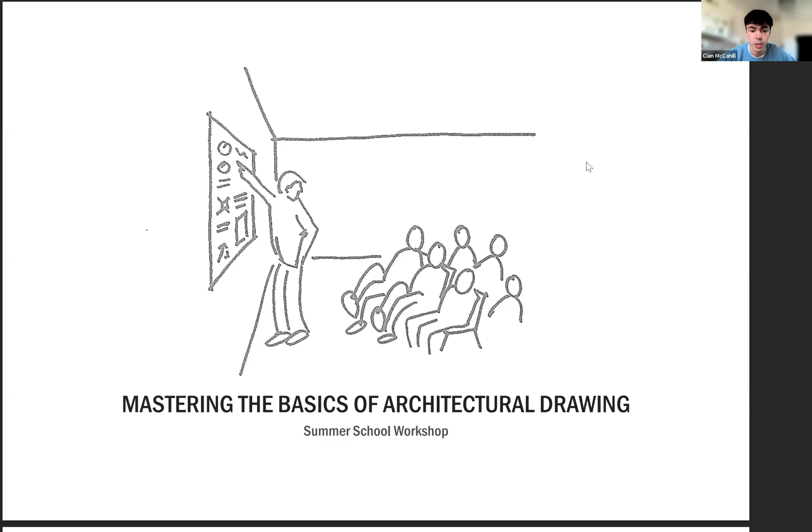So about me, I've wanted to be an architect since I was sort of 8, 9 years old. I've always loved drawing. I was pretty good at maths and things like that. But also, hey, I really love playing Minecraft. I love my Lego, everything like that. It all helps. You speak to a lot of people in first year of uni and they all reference Minecraft, weirdly.

GCSEs I took that sort of mirrored those interests, and then A levels the same. So I took art, maths, and physics at A level. That was in Northampton. And then when I got my A levels, I moved to Norwich University of the Arts. I'm going to boast and say that the architecture building in Norwich is like one of the coolest uni buildings, Boardman House. So I spent 3 years there, annoyingly through COVID. So I started there in 2019.

So I finished there in 2024 and then got a job as a Part 1 architectural assistant at Kirby Architecture, which is a practice based in Suffolk. You can see my team there: Sam, me, Andy, Alex, and Miles, the director. And I finish there literally in a couple of weeks. It's been a really good year, really enjoyed it, learned a lot. But in September, I'm off to do my master's at Manchester School of Architecture. So I'm looking forward to that.

So I want to go through what it takes to become an architect, in this country at least. So you get your GCSEs, and then you will get your A levels or A level equivalent. Hopefully, some things that are somewhat related to the course. Although some unis aren't too bothered as long as you have a good portfolio, or you can talk about what you want to study, the kind of thing you enjoy. So then, yeah, obviously you go and get your degree.

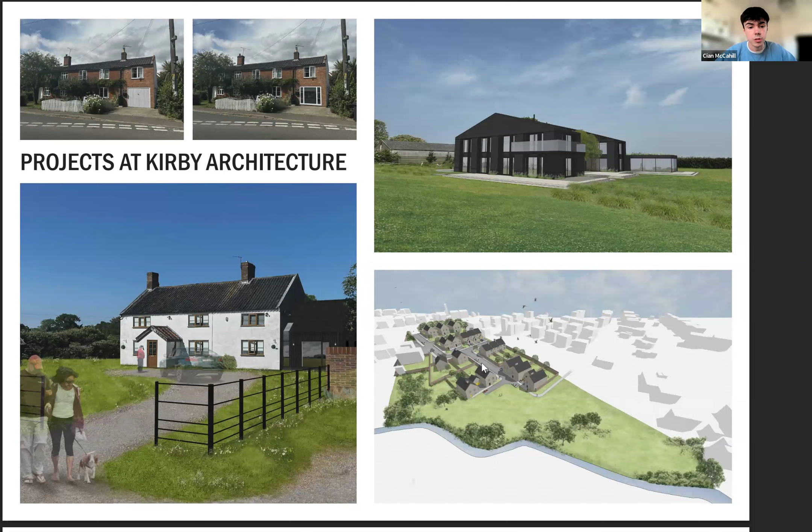So that's master planning. In the bottom right, you can see a housing development in Oxfordshire that we're currently working on. That's what it will look somewhat like. We're still getting lots of comments back from the council and people that live around the area. But yeah, that's in the works at the moment. So big range of scale.

It's been great fun. So today, obviously, I'm here to give you the basics of architectural drawing, but I'm also here to answer questions. We'll have a few tasks. Nothing serious, we can keep it pretty chill. I'm also going to be heavily referencing this book here. I've got it with me as well. 101 Things I Learned in Architecture School.

That's maybe one of my favorite books of all time. It's a fiction book, but it's just about cities and spaces, and it's kind of magical. It just gives you a new way to think about cities and architecture and places, and it's amazing.

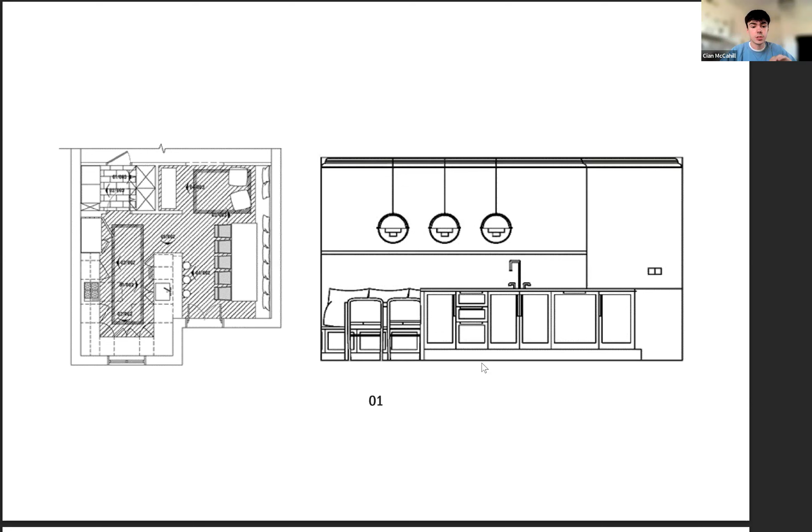And as soon as you make the one change of changing line thicknesses, suddenly you gain a bit of depth. The drawing becomes more legible. People can understand it more as a 3D space, even though it's just a 2D drawing. So that's the other thing, line hierarchy. So they're your 2 rules for today: how to draw a line and line hierarchy.

So I want to go through the 4 main types of architectural drawings. Some tutors at uni will say there are many more. Some will say there are actually just 3. But for today, I'm gonna tell you guys that there are 4 main types of architectural drawings.

Cian, just before we get onto that, if I could just jump in. Yeah, go for it. We've got 2, I think, really good questions. Obviously we won't jump in and do this all the time.

Yeah, that's fine. But do you think architecture is done mostly digital now, or is it still mostly hand-drawn work? I would say that in the professional world it now is mostly digital. But that doesn't mean to say that clients and other architects don't really value an architect that can hand draw. So no matter how good your digital work is, an architect that can hand draw and quickly sketch up an idea for a client on a bit of the classic napkin story, that's always going to be impressive. So I think it's always important to know how to hand draw. Yeah, for sure, absolutely.

And sorry, Mana. Yes, we will do. You'll get sent this stuff. Yeah, thanks, Otti, for that question. Lastly, Jude, and then we'll get back onto your session.

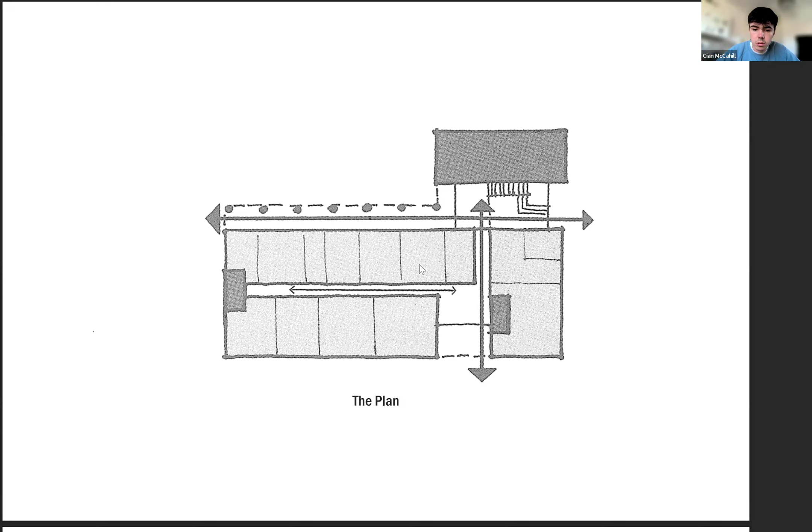You guys don't need to know this really, but usually a plan is taken at about 1.2 meters above ground level, and it's like you're taking a slice through that 1.2 meter level. So you'll see walls, you'll see where the windows are going to be, you'll see furniture. Arguably the most important type of architectural drawing. And then these. Oh, it's not flicking to the next page. There we go.

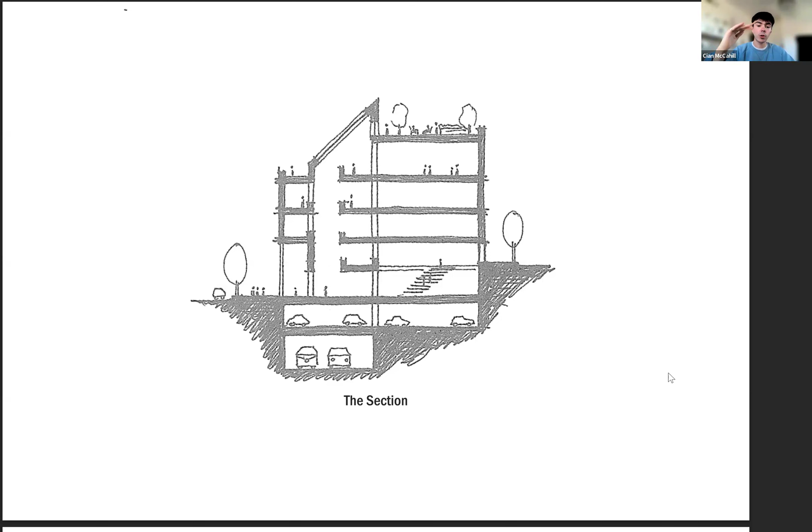So the next type of drawing I'm going to talk about is the section. So a section, you have to imagine a building like a cake, and you're taking a slice straight through the middle of the cake, and you're looking in 2D at that slice. So with this, you'll see the heights of floors, you'll see stairways, you get a good understanding of the internal spaces and the volumes through a section.

And then the next type I want to talk about is the elevation. So again, another 2D drawing, but instead of taking a slice through a building or looking down at a building, we're now pretending that we're stood next to a building and looking at that building in front of us, but completely two-dimensional. There's no depth to it. We're not drawing lines that disappear off into the distance. It's all very 2D. And we use these a lot to show, again, heights and things like that, but also the materials that we're putting on the outside of a building.

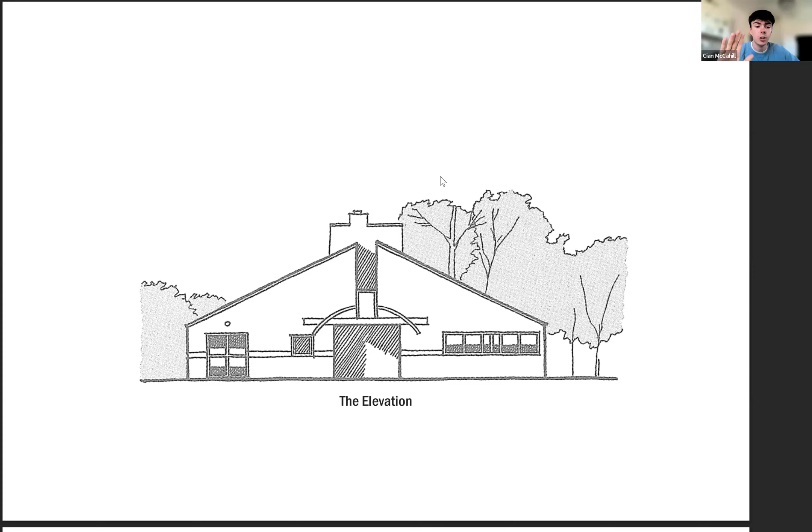We'll often show lots of options for clients of elevations of the building with different materials drawn or different window types, perhaps. But yeah, so elevations are used to show what's going on the exterior of a building. And then again, some examples, super sketchy ones, real simple ones. The bottom right is the kind of elevation we do at work. Again, really simple, but all the information that is needed is there. And you can see all the line hierarchy again in some of these, and how important it is to be confident with your lines.

And then finally, we're talking 3D. Now, there are many types of 3D drawings. You've got all your perspective drawings or oblique, isometric, axonometric. There's loads of types. You will learn about all of those when you go to uni. Maybe you already know about them now. But yeah, loads of types of 3D drawings.

But what they're really good at showing is just how a space feels that sometimes a 2D just can't quite capture. A lot of the time we'll be in a meeting with clients where we show them the plans, the elevations and the sections, and they're kind of nodding along. And then we go to our 3D drawings or our renders, and suddenly their face lights up and they actually understand what the building feels like. And it makes sense because, some of you might agree, some of these drawings are showing the building the best, perhaps. But yeah, so they're your main types of drawing.

So I guess that takes us into our first task. Really simply, I want you to spend 5 minutes drawing a plan of the room you're in. So bird's eye view, down at the room you're in. Things like the walls should obviously be your thickest, most obvious lines. But take time to draw the furniture that's around you as well. It doesn't have to be too big, this, by the way. And yeah, so 5 minutes doing that, and I'll flick back to the plan page as well, just so you can see. But yeah, 5 minutes drawing a plan of your room. If you've got any questions, feel free to ask.

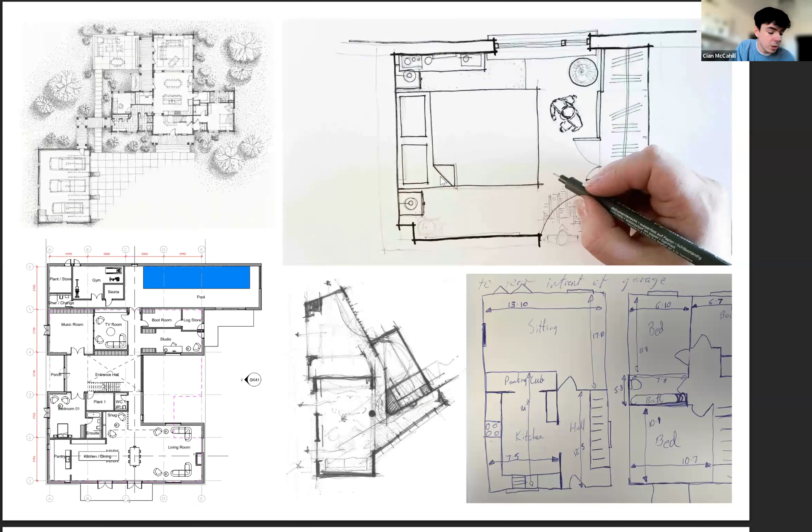There we are, Jason. Can you still see? You can't still see that screen, can you? No, but I can see it myself.

Okay. No, it's fine. So I'm going to take this opportunity to show you the Padlet board. So whilst you're working on this 5-minute line drawing of your room, I'm just going to show my screen. So you should be able to see that screen now. So for those of you that this one's your first week, this might be the first time that you're seeing the Padlet board.

After every task, what we'll do is we'll ask you to share your drawings to Padlet. Now, there's lots of different ways you can do that. Most of you will be using a pen and paper, so you want to take a photo of that, and then you can upload that onto your Padlet board. You can do that via your phone fairly simply, and we'll be dropping the Padlet board link into the chat, if she hasn't done so already. I can't see the chat right now.

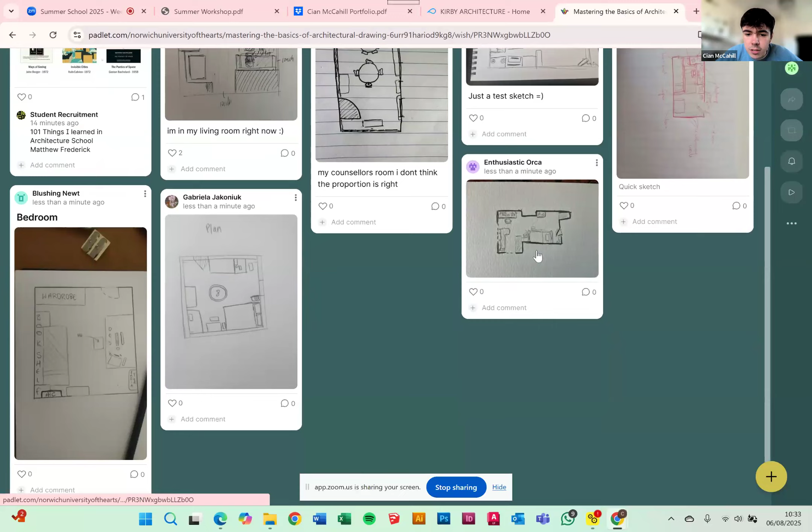this here, that's brilliant because you've got these thick outer walls. You can see the furniture in finer lines. You see the doorways. Yeah, brilliant. Really well done. Again, this is great because the lines are confident. And actually, I answered the question that you could label things, and obviously these have been labeled. But the drawing tells me everything I need to know without the labels, to be honest. And I can see that you're sat there.

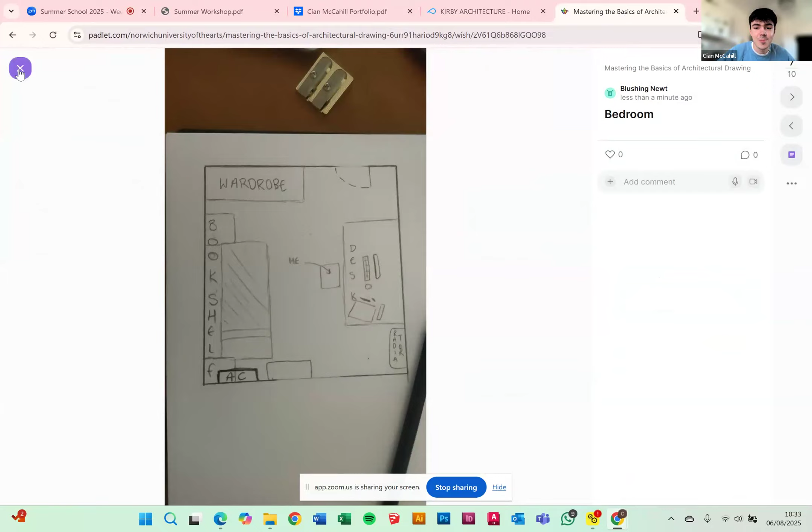Hello. Oh, fantastic. Yeah, really good. Someone's got the markers out. I love it. Yeah, really awesome. Cool. Am I okay to go on to the next task? Yeah, definitely. Obviously, if people are finishing up their designs, please do, and then add that as we move on to the second task. But this really is a really short task, so we're going to move on to task 2, I think.

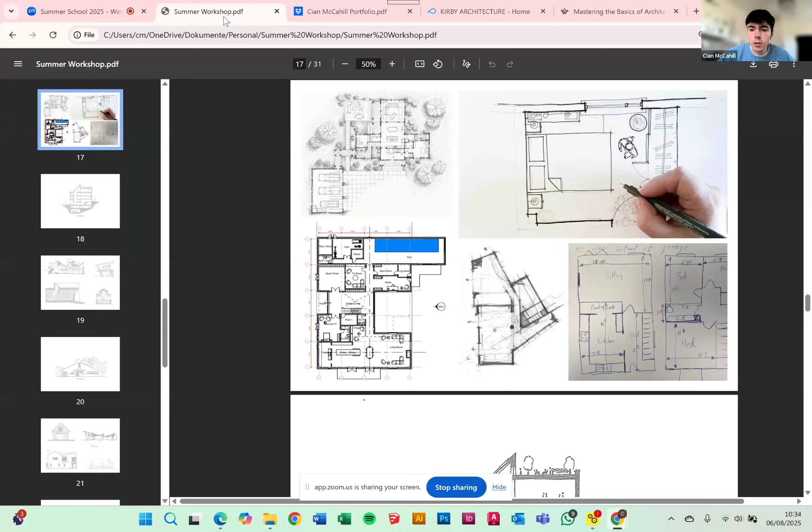Cool. So, if you haven't guessed already, the next task is to now draw a section through the room you're in. Don't worry if you're still drawing your plans, guys. No pressure at all. So I'll go back to section. So remember, this is the slice through your building. You're going to see heights of things. You're going to see the furniture that's been cut through. You can pick where you cut through the room. Maybe there's a messy desk that you don't want to include in the drawing. But this time we're looking at it like a slice of cake through your room.

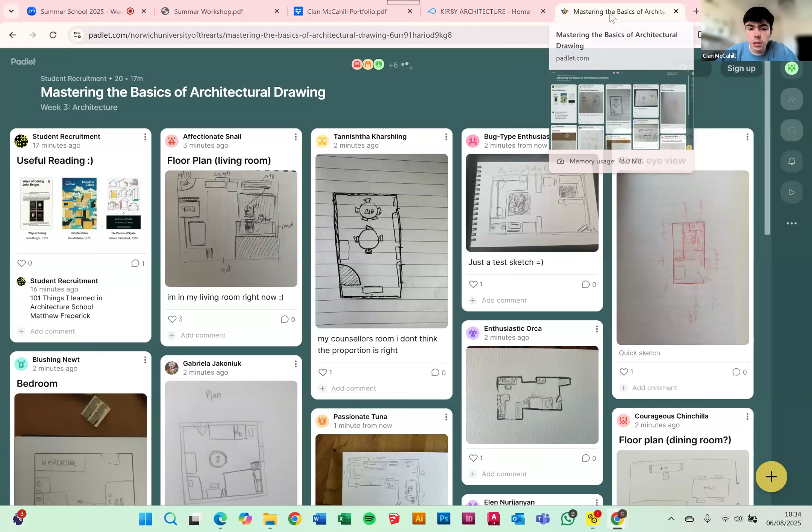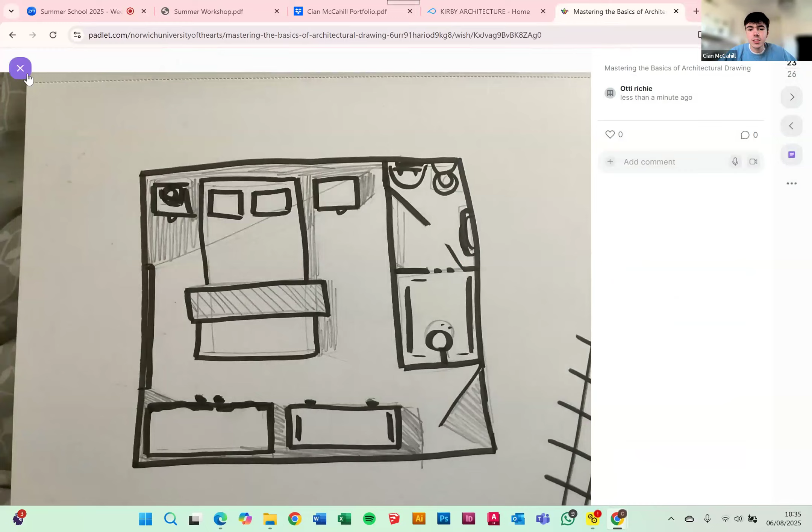But while you do that, I'm going to carry on looking at some of the plans. Again, this section task is pretty quick, just real simple drawings. Yeah, that's great. It's really good. Cool. Even some shade from the window. Really good. So it seems like all of these show that you all have a pretty good understanding of how a plan works, what it's meant to be showing. I feel like all of these would do a good job at showing a client that you understand their space, their room, their house. I really like the ones where you've rendered in the floor or where the shade in the room is.

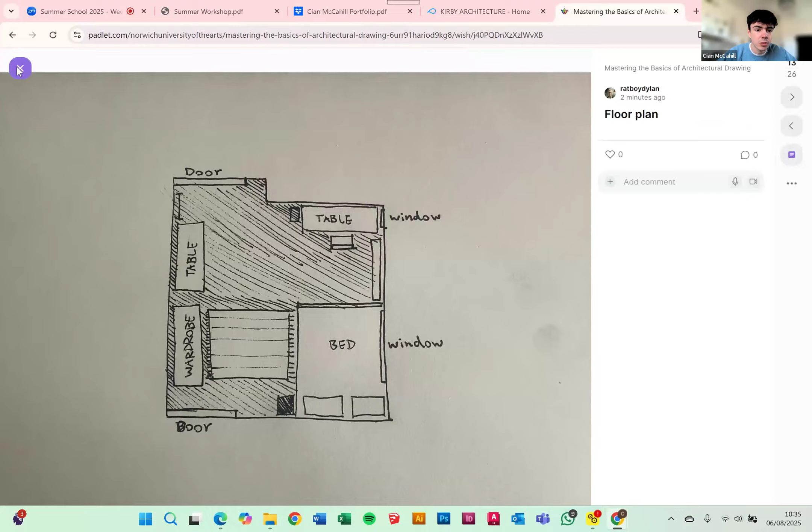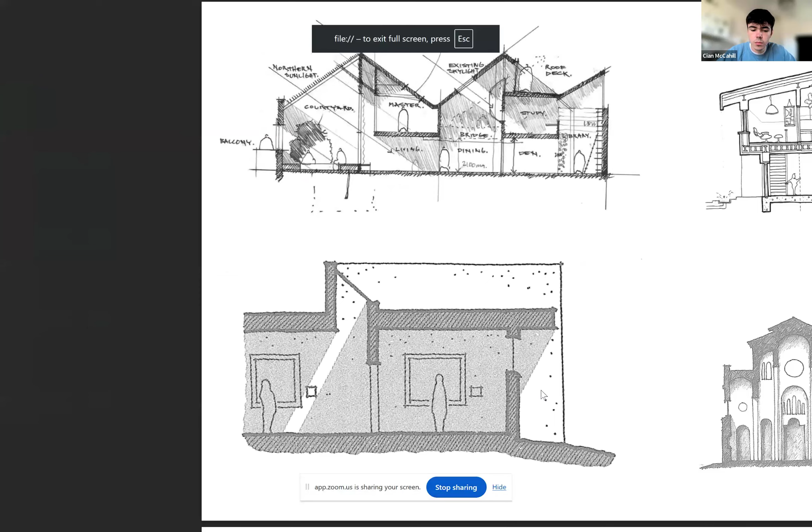Right, I'll go back so you can see the sections again. So just a few minutes working on a section now. Yeah, if you keep the slide up of the sections, it's a nice example for people to reference. Yeah. Again, maybe you've noticed as well that the most successful ones here also show a bit of where the light in the room is. If you want to experiment with that, go for it too, where the light from your window is coming in, at what angle. Obviously, that changes through the day, and sometimes that's why we design buildings a certain way. But feel free to draw what you wish.

I think if we give people maybe 10 minutes to do this task, or just under 10 minutes. So we'll give everyone until 10:45. Awesome. So that's 9 minutes to do this, a slightly more detailed task than task 1. If anyone has any questions or needs clarification of anything, please do write in the chat. I'm busy trying to like all your task 1 images. If I miss anyone, it's not personal.

Yeah, I've got another question for you. I feel like this question comes up in most workshops now, but basically the use of AI. How much has AI improved work? First of all, what do you think about the use of AI in architectural designs? We'll start with that and then move on to how you use AI.

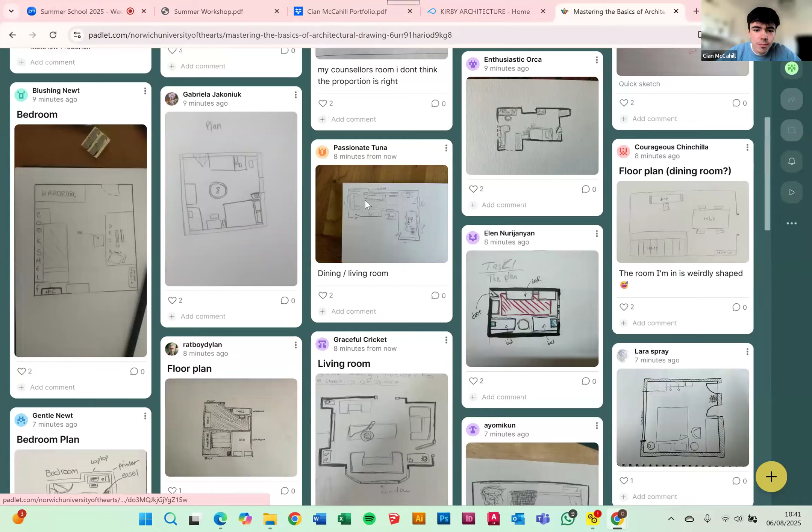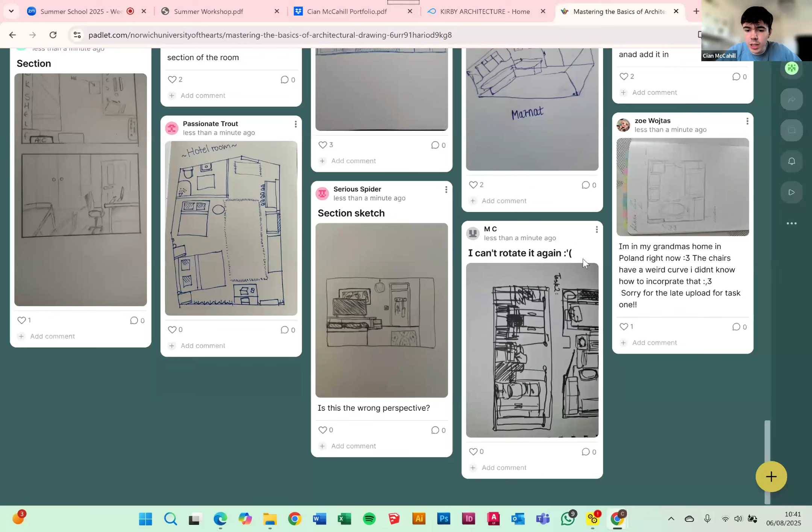I'm just gonna have a look. Do the most recent ones come to the top on here? At the bottom. Ah, cool. Oh yeah, I see. Awesome. Really good. It's great how easy it is to understand someone's room with really simple 2D drawings. That's okay, you don't need to rotate. That's a great plan from earlier, by the way. That's really nice.

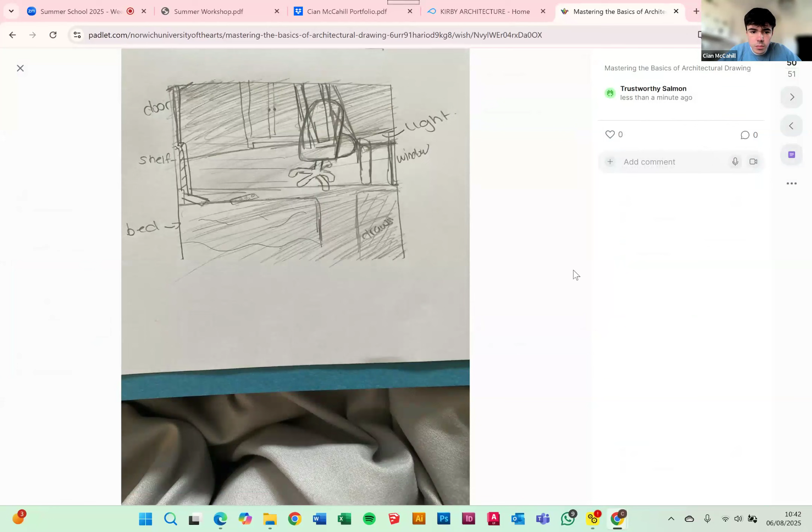Sorry, we should have said there's nothing wrong with using digital, like I think Salmon is. That's absolutely fine as well, isn't it? Definitely. I would say probably a quarter of the students on my course would come in with their iPads rather than a sketchbook, and it's just the same. Really, really good.

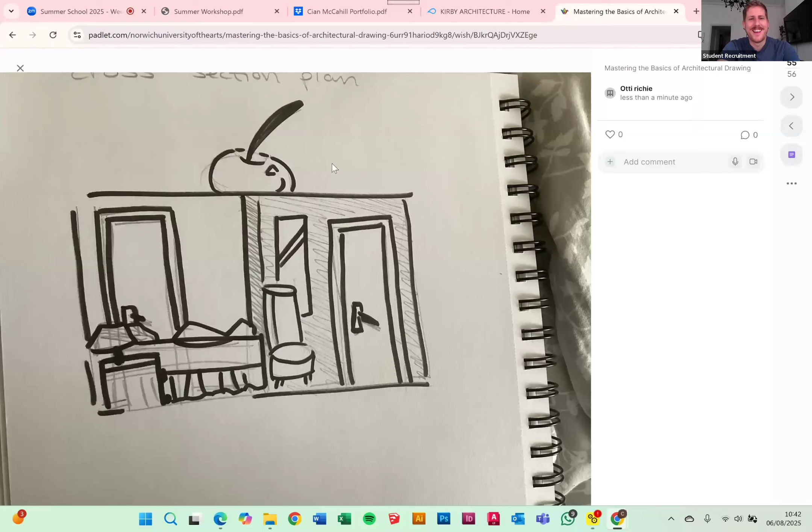Yeah, awesome. The cherry on top, so 10 out of 10. Yeah, smashing it.

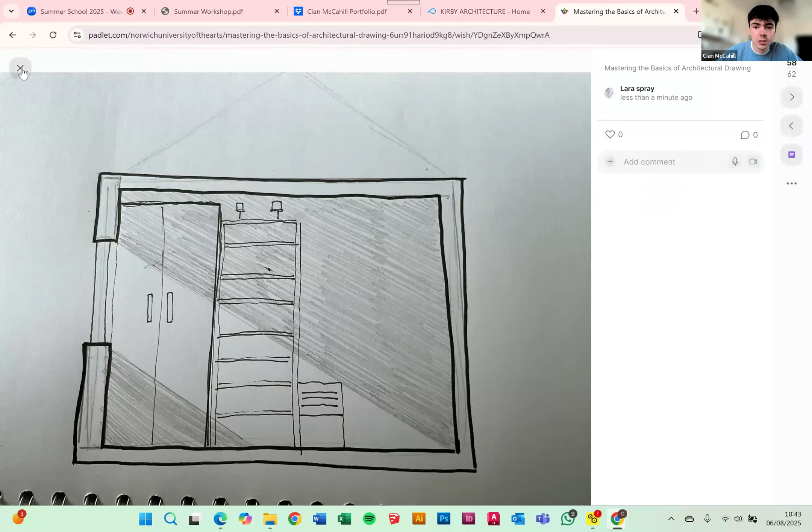This is really good. This is, yeah, that's like how we draw a section. It's 2D. I can see where the wall's been cut through. I can see where the window is, the light coming through. That's a really successful section. Yeah, well done. Yeah, again, same with this. That's really, really good.

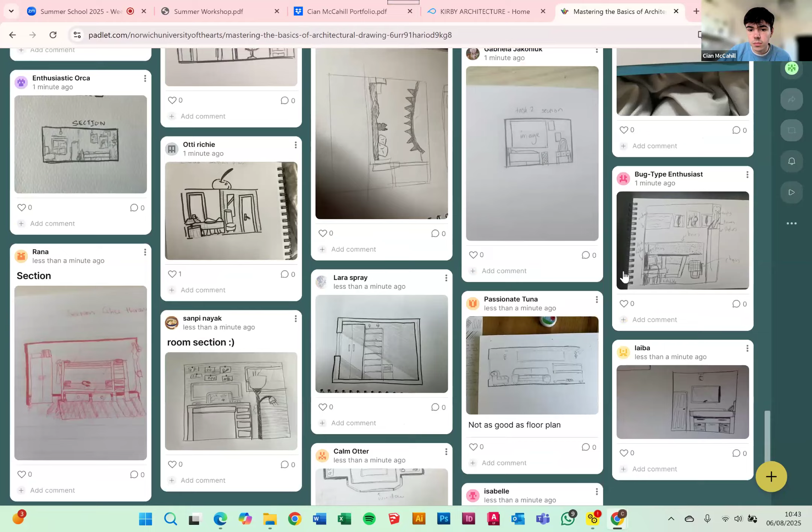So all of the drawings you do now, the question came up earlier about whether you do digital or hand drawn more. So obviously we do a lot of digital versions of these, but it's so important to be able to go to a site visit or whatever and quickly be able to sketch these up. Even if you do end up drawing them on CAD later on, it's so important to have the skills and the understanding. Yeah, these are really, really good. Okay, back to that.

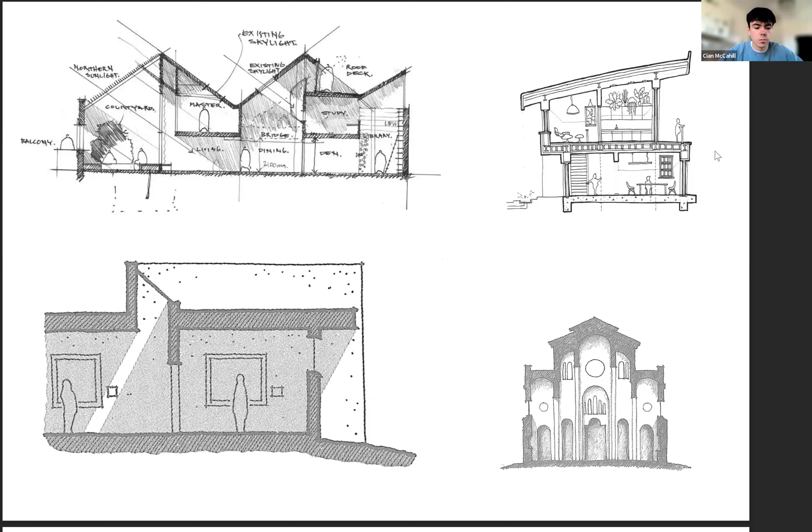Cool. So yeah, thanks so much. I can see lots and lots of uploads now. Yeah, I think we're good to move on. Cool. Are we okay to jump right into another task? Is that okay? Yeah, I think so. Yeah, go for it. Cool.

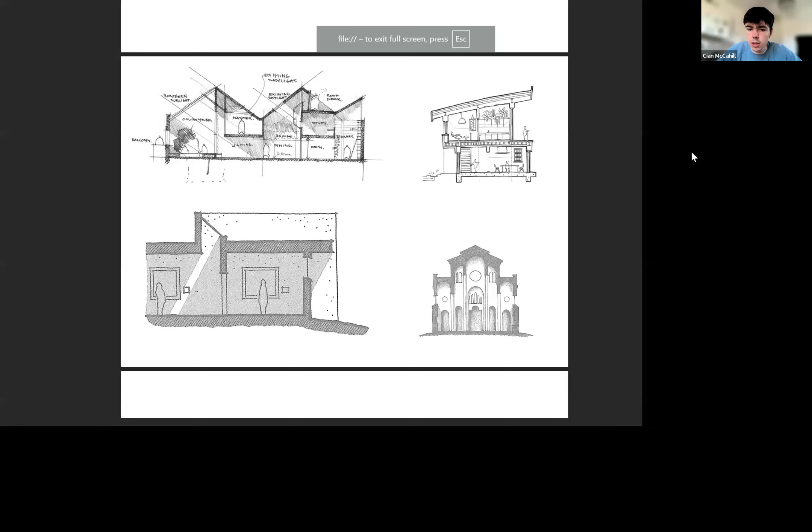So if you hadn't guessed, we've done plan, we've done section. So next was elevation. So I want you to draw an elevation of the building you're in. Again, you pretend you're stood outside of wherever you are right now, and you're drawing a 2D view of what's in front of you. So this will show the materials on the exterior of the building you're in. It will show what the windows look like. It will show what kind of roof. But just remember, it's two-dimensional. So yeah, that's the task.

I was wondering if I could also go through my portfolio or my company's website while we do that one, or do you think it's better to leave them to it? Yeah, no, absolutely. Can you just repeat that task again? Yeah, sure. Wait, and I'm sharing, right? Yes, you are now. Cool, cool.

So yeah, this is drawing an elevation of the building you're in. So two-dimensional, stood outside, looking at the faces of the building. Usually there'll be four, maybe more. And yeah, two-dimensional, show the materials on the exterior of your building, show what the windows look like, the roof type, and then the examples will look something like this. Top left, very simple.

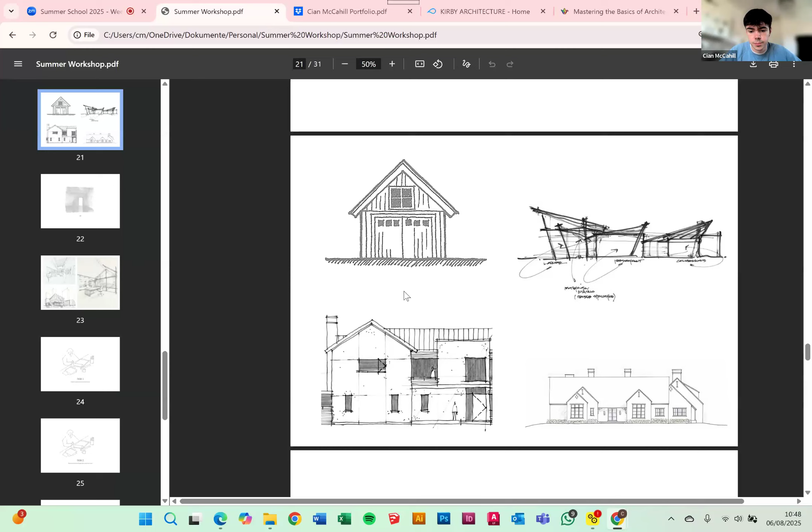Okay. Yeah, I much prefer to design by hand, for sure. Nice. Do you have that? Obviously you're part one, you're in the start of your journey. Well, not even the start really, kind of middling the journey.

In architecture, is there freedom as designers? Is there a freedom to work to your style, or is that based on the company who you work for? I could try and sell you the dream that no matter where you end up, you'll have freedom. But yeah, I think you're right. It really depends on where you end up working. But some people really like the idea of having a set rule set, so that's the company they end up in.

Some people obviously like to write their own rules, and they'll be the people that go and set up their own practices and be really successful, finding their own clients and things like that. So whatever you want, you can pursue for sure.

Oh yeah, nice. Actually, it's a nice little segue. As people are working on their elevations, if you could show us your portfolio, that'd be great. Cian's portfolio also will be linked into the worksheet that we send out later, so you will have access to looking at his portfolio.

And this is really good for people who are thinking about going into architecture or even interior design. We also have an interior design course here at Norwich University of the Arts. It's more interior architecture, so very closely similar to the stuff that we're doing today. And this is good to start thinking about.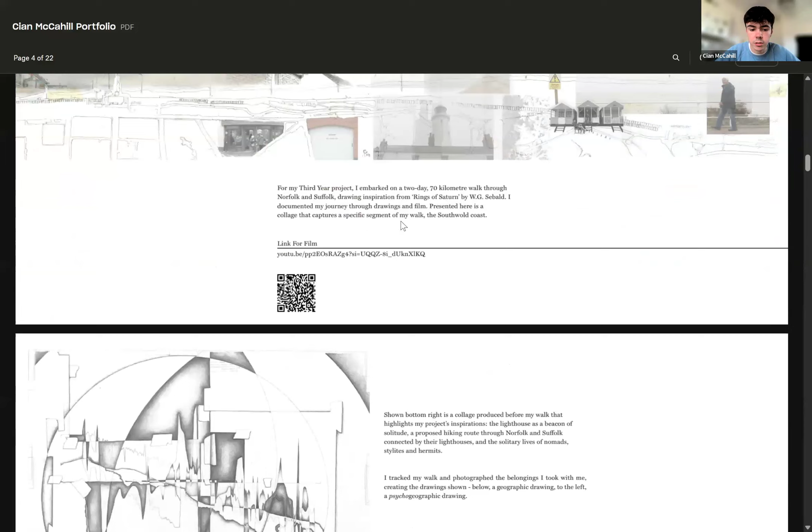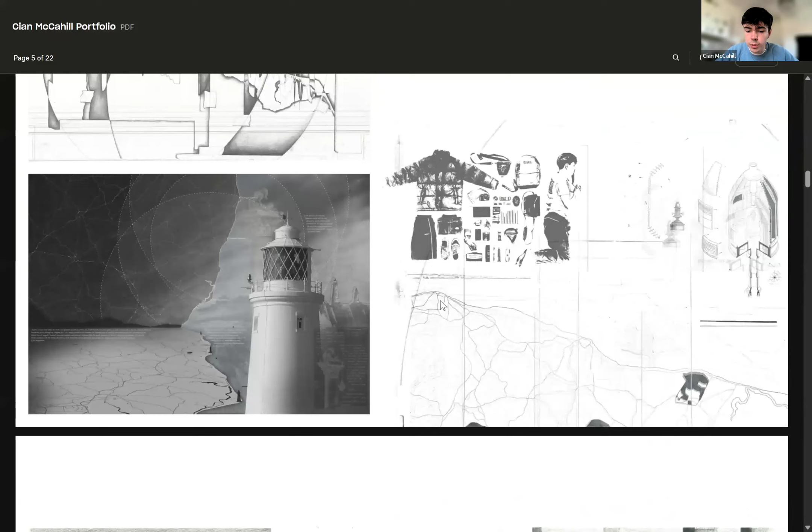A few other drawings. I also became pretty obsessed with the lighthouses that I saw on my walk, so there are a few drawings and collages of those. And there's me and all the stuff I took with me on my route through East Anglia. And then these plans in the middle, some floor plans of the Airbnb I stayed in midway through my walk. These were just some of the spaces that I felt like I occupied on my walk.

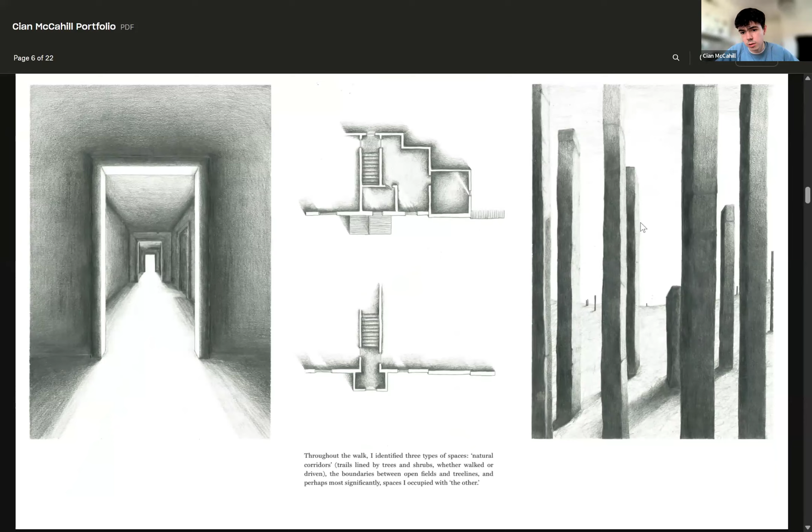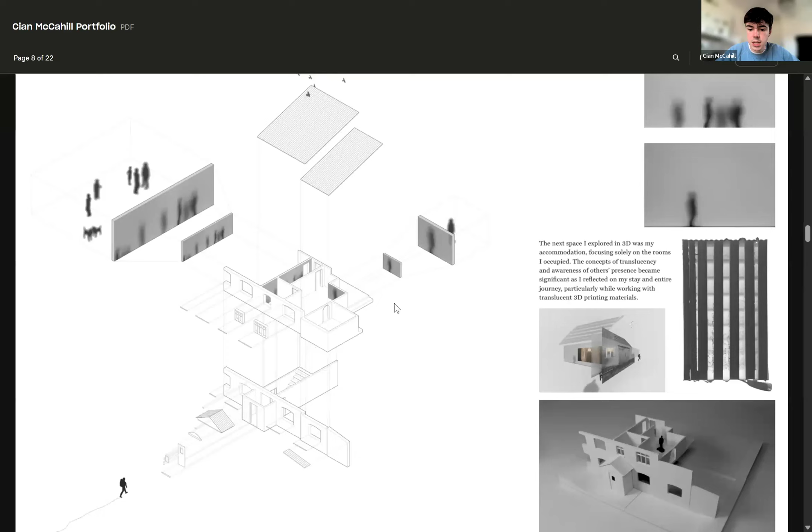A 3D plan and then another 3D. I was trying to pretend that this was me walking through some of the tree spaces that I was in. And then this is one of the 3D type drawings I was talking about earlier. It's called an axonometric. This is like an exploded drawing, and it's just me investigating some of the spaces that I went through on my walk. And then another blown up axo of the Airbnb I stayed in, some other photos I took for materials, and another exploded axo.

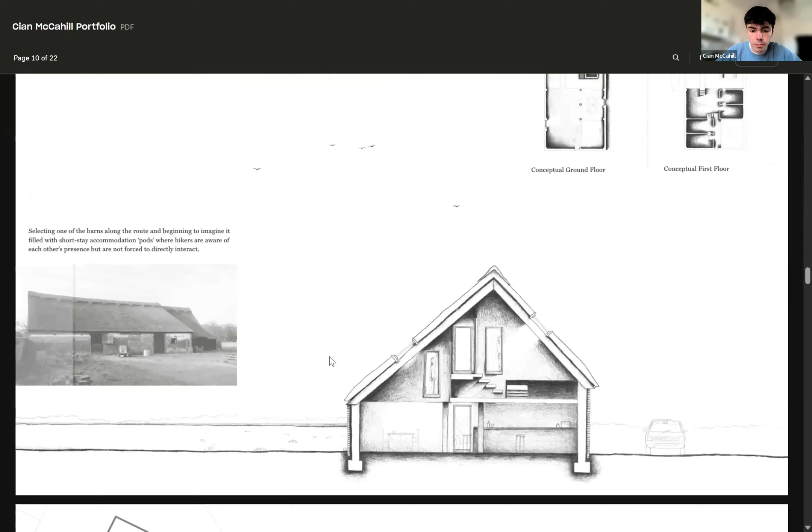And then this is a section, which you guys have just been drawing, through a barn I saw on my walk that I was going to propose little pods for hikers to stay in, and then some plans of what that barn could look like, and a cut through, a more technical section showing the materials of that barn. So that was that project, and then here's my second year final project.

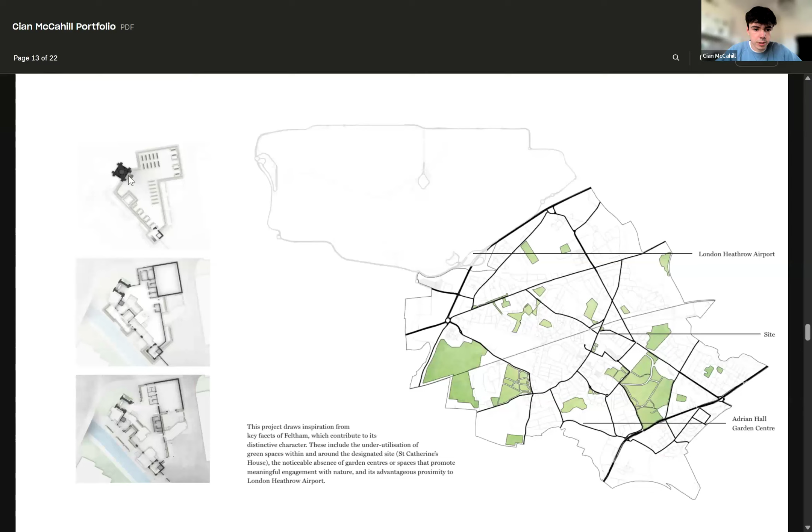So this was in Feltham in London, next to a listed cathedral. This is a big site plan of the area, and I wanted to propose a horticultural centre because there wasn't enough green space in the area, nowhere for people to plant or garden. A little model I made of what the interior could look like. Some sections through my proposal, some watercolor elevations of my proposal, and a little internal render.

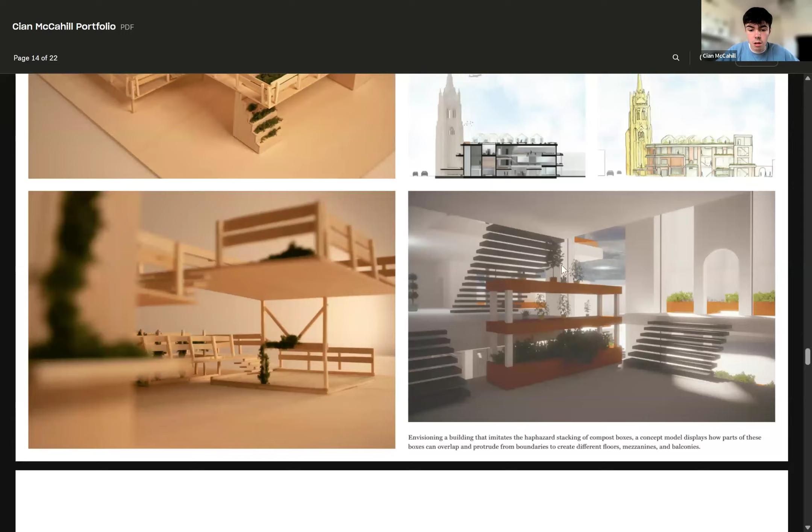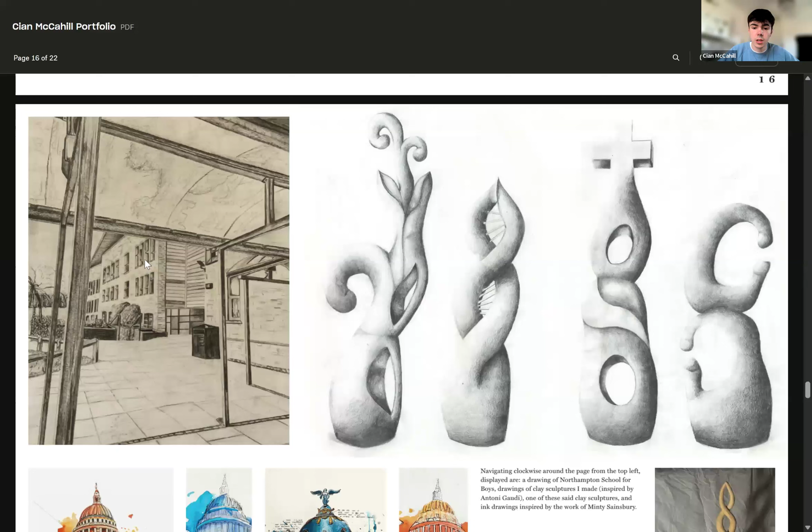And then here's just some work that I did pre-university that I thought would be interesting to show. Like I said, I was really into my drawing, so that was the school I went to. These were some sculptures inspired by Antoni Gaudi, who's an architect you might know. He did Sagrada Familia, and some watercolors and ink drawings I did.

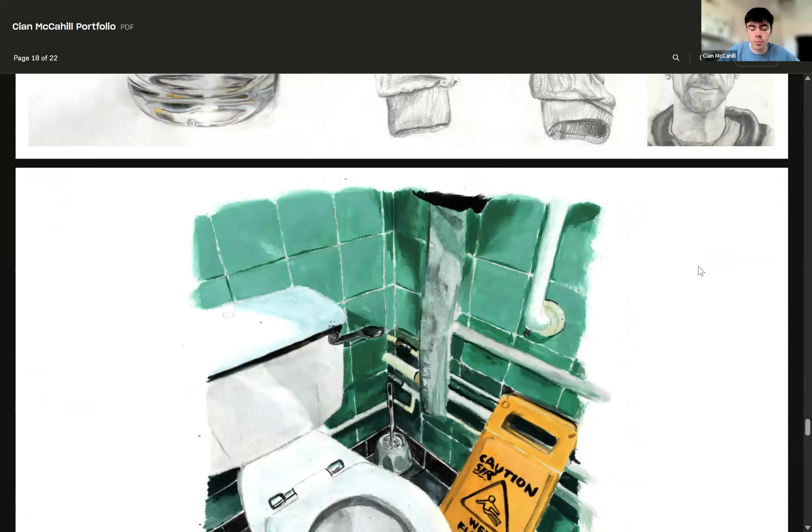Some still life bits, some portraiture, and this is like my favorite painting, the whole thing, despite it being a painting of a toilet. But just showing everything that you can do, you are good at. It's all important to include in your portfolio, especially at the stage you guys are at.

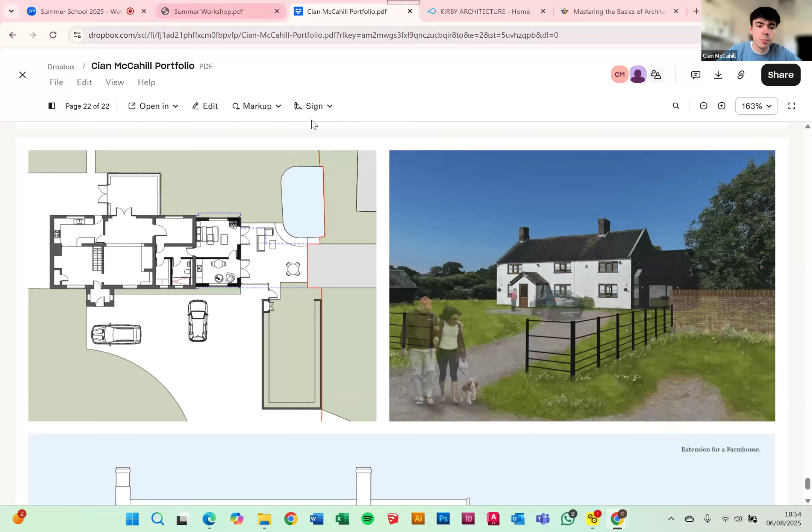And then I also just showed what we're up to at Kirby Architecture, some plans and renders and things like that. Some of these you guys have seen. But yeah, that's my portfolio that I'm now going to Manchester with as well. I'll go back to. That's cool.

I think yeah, showing your design skills, so showing you as an artist is, I think, probably the top tip for students thinking about admissions portfolio for university for undergrad. Also, I like the glasses because you're showing perspective, and you're showing that you understand 3D shape. Yeah. Also, the Gaudi structures.

You're showing that you understand about space and structure. I think that's super key. Then not just, oh, I can draw a house, or I can design a layout of a room. I think it's kind of going back a step, isn't it?

Just quickly sketch yourself some little people and build the scale from that, because architecture is all about how a person interacts with the space. So why not start with them? And obviously the average human's going to be somewhere between 1.5 and 2 meters probably. I'm sorry if I've left you out if you're short or very tall.

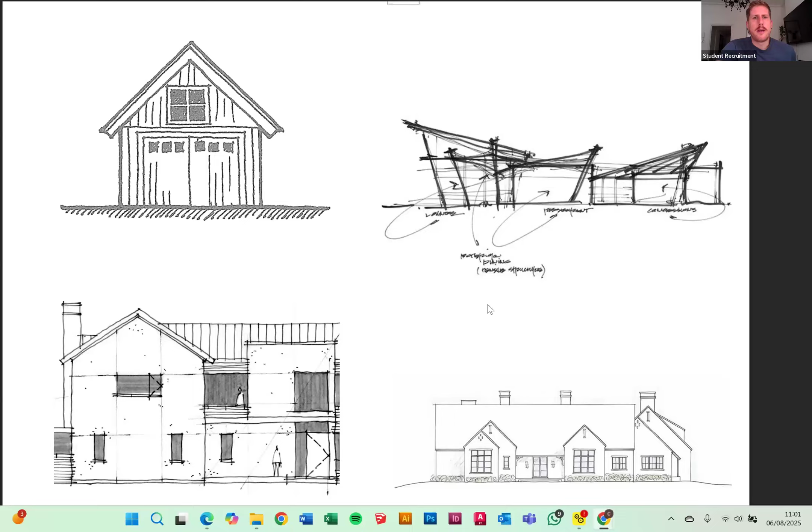Cool. How are we all doing? Do you want to share the Padlet board again and give some feedback? So still looking at some sections. Here are the elevations. Perfect view of the front of the building. 2D. I can see the brickwork. I can see the windows. Really good.

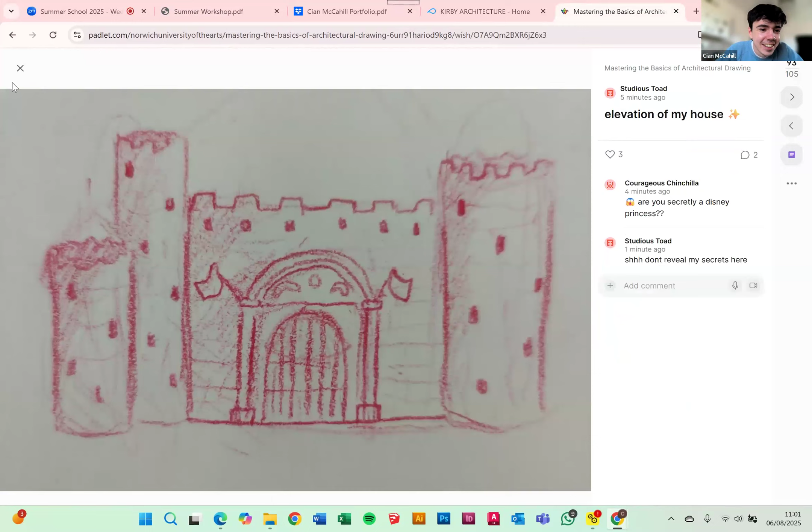Someone's in a castle today. Welcome from the castle. Awesome.

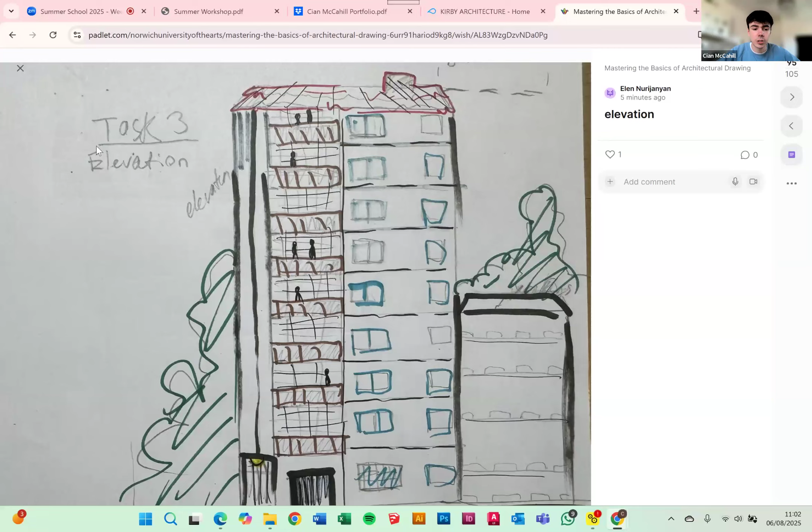Yeah, this is fantastic. I like the different markers to show you different materials and things. Adding the trees and stuff is really important because it gives you your site context. This is really awesome. Cute house. I like it. These are really, really good.

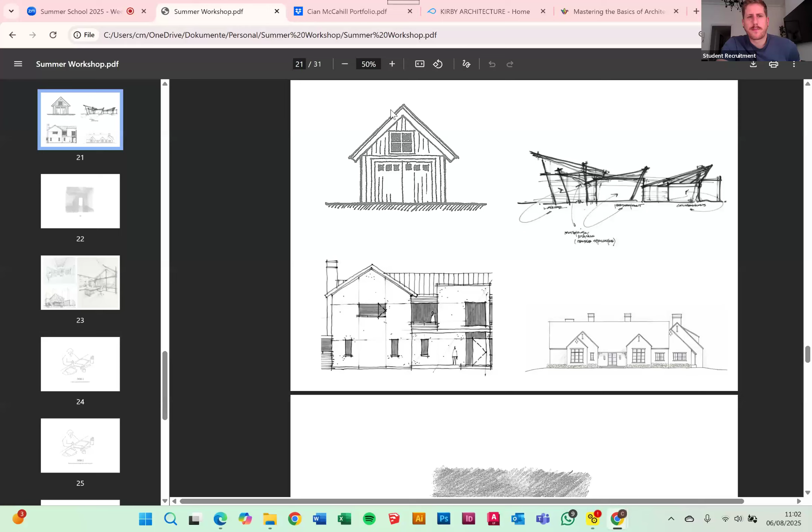Am I all good to move on? Yeah, absolutely. Cool. Hang on, let me just.

Okay, so you now have three 2D drawings of an existing building or an existing room. But as architects, we come up with new ideas, or we work with clients on what they want to do next, and we create design proposals. At Kirby, we come up with lots of options, and clients pick the best part from each. But some companies will design one option for you, and you go with it. You work with them, and they give comments. You get a range of different ways to work through design proposals with clients.

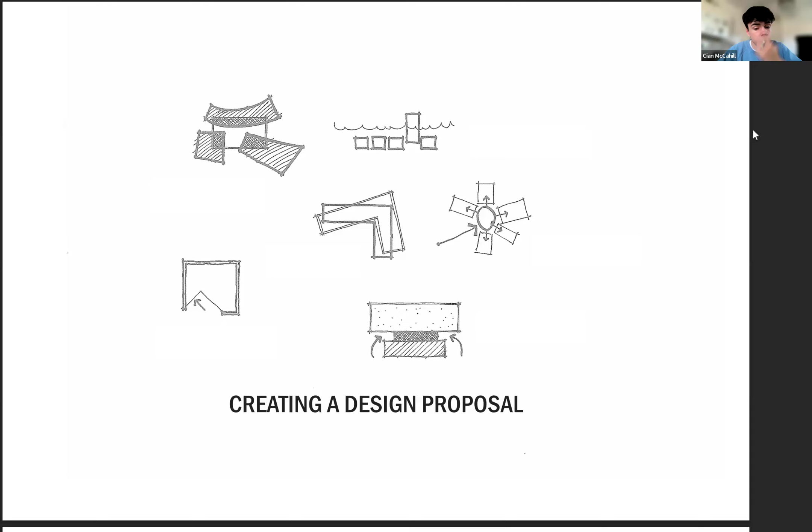The kind of thing we might do is these sketchy conceptual drawings of spaces, which is how I start planning out a floor plan. You can see on the right, obviously the rooms aren't actually going to be oval shaped, but you can see the kind of spaces and how they would all link up. So it's a really loose floor plan. At the bottom you've got a gathering space, and here you've got a resting space, and they overlap a little bit.

And it can be crazy. It could be a swimming pool, it could be a trampoline park or whatever. Just add this on to the side of either your plan, section or elevation, or feel free to redraw. But it's just about coming up with a new space and a new program for that space.

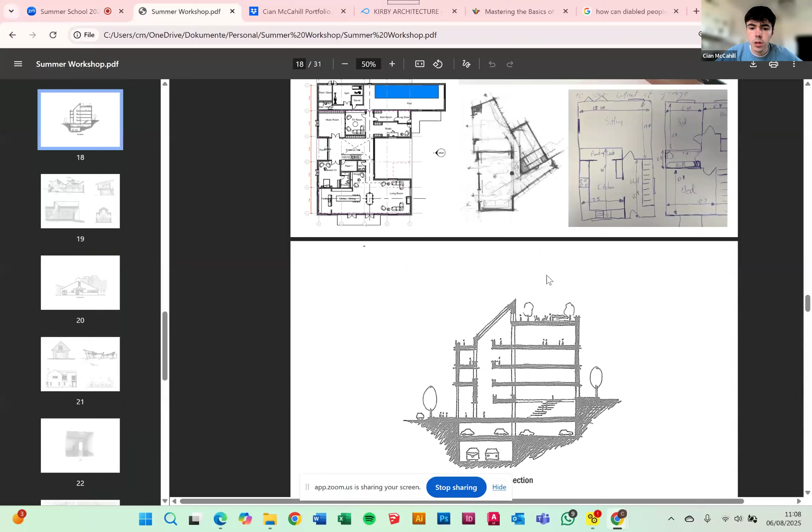Could you show the examples again? Oh, sorry, I thought I was sharing then. So obviously you've got your plans like this, sections like this, elevations like this, and then you're just coming up with a sort of sketchy addition to your plan, or if you want to draw it more definitively, go for it as well. Yeah, just with your crazy addition to where you are right now.

Yeah. Oh, you're muted. Always makes me laugh when I do that. Yeah, if you could keep up the examples on the screen, that'd be amazing, just so when people are working, they have something to reference. There were a couple recent questions because I can't see them while I present this. Are you all right to just? Yeah, absolutely, of course. Oh, it's not there yet. Oh, hang on. There we are. Amazing. Can you see it now?

Thank you. Yes. So it's a nice, interesting question from Rachel. I don't know if you'll be able to answer this, but tell us your thoughts. How would you say the path to becoming a landscape architect is different than that of being an architect like yourself? In fact, I've probably done everything so far that a landscape architect might do also. This might be where paths diverge, because I know that while I was looking for master's courses, there were actually master's courses for landscape architects. But don't quote me on this. I think you can also find the undergrad degree in more specific landscape architecture.

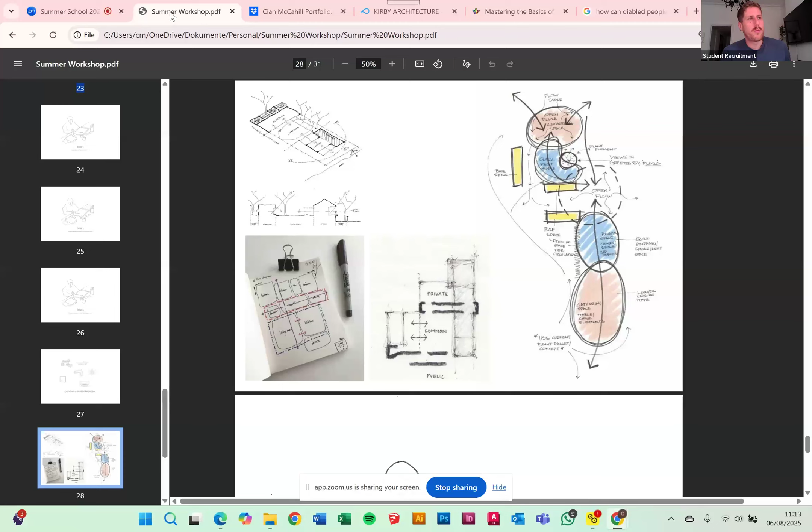Definitely. There's also an opportunity, I guess you didn't do these, but there is the foundation course. We call it the integrated foundation year. The university might also look at your portfolio and go, there's loads of potential here.

We're going to offer you the 4-year program, and that first year, the integrated foundation year, is a slightly slower year. It kind of gives you the opportunity to really develop your skills in drawing. Yeah. So there's lots of that information as well. In fact, some of the people that joined my course that had done their foundation came in as some of the most successful first years, because they'd had a year building their skills really well.

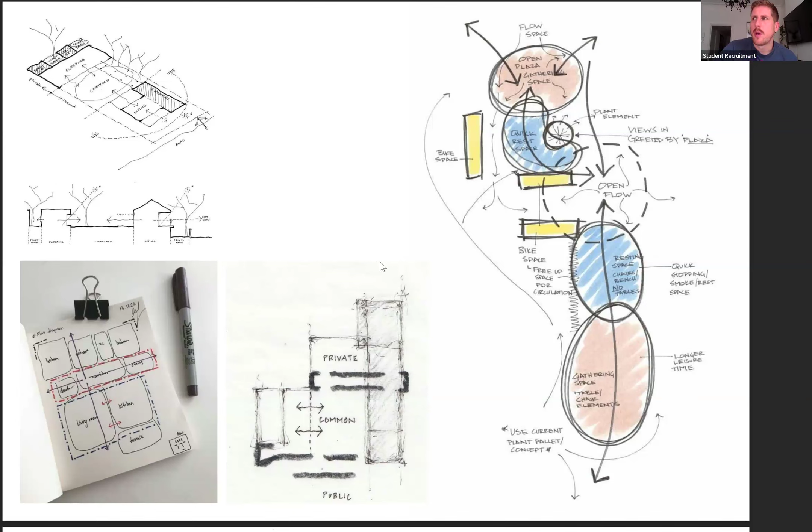Yeah, and I did reference A levels before, but obviously we also recognise T levels and BTECs as well. So it's not just A levels. But yeah, it's 120 UCAS points, whatever that makes up in terms of whatever course you're doing. So students will do the qualifications as well. So yeah, just have to work out whatever your qualification is, and then the UCAS points.

So on the UCAS website, there's a handy tool where you can put in what qualification you're doing. So if that's an A level, a BTEC, an IB. We also recognise the EPQ as well within the UCAS points for our university. Not all universities do that.

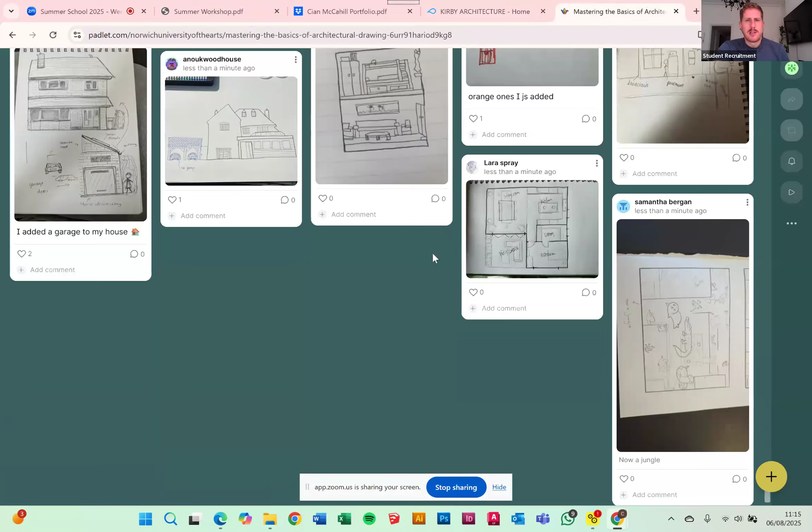Cool. Okay, so we've got some additional things already. Wise Shrimp. I love these names. I'm guessing that Padlet Board makes them up. But yeah, Wise Shrimp's nice, really simple but really effective. Kind of added a garage to the house. Right, I'm gonna have a look. Some nice work there. Oh yeah, some of these are awesome. Yeah, great.

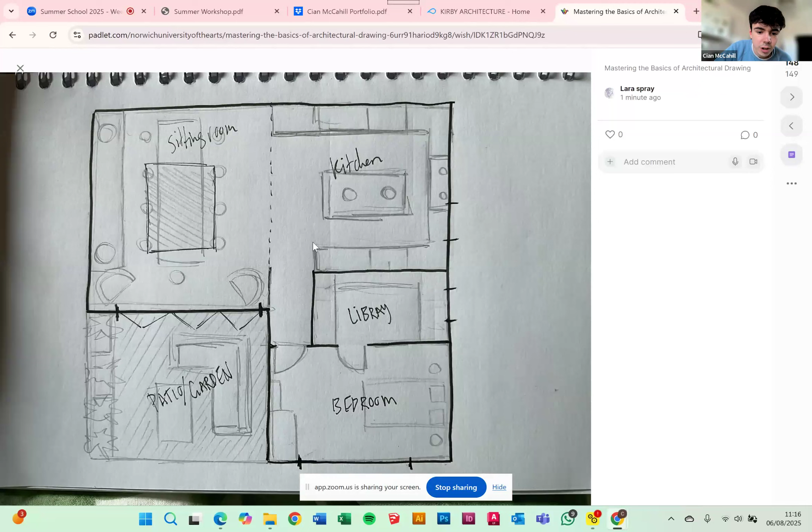Cool. So yeah, it's cool that some of you have done it in plan, others have done elevation. This is amazing as well. This is the kind of project we do at our place, like a car garage. And we could easily sketch something like that up for a client in front of them. So that's really good. What else we got here? Patio. I'm guessing this is the addition here. Yeah, this is great. This is a great floor plan. Really, really good.

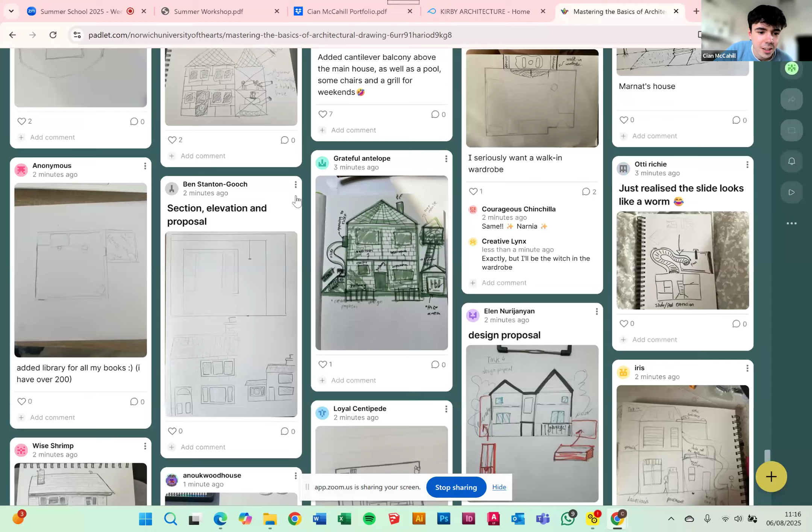Yeah, I mean, come on, look at that. Look at that. I want this house. This is what I want. Yeah, these are awesome. Really, really good. Second time I've just done that.

Okay, so we've got a few more questions just to kind of finish off today's session. It's flown by. Whilst we're doing a Q&A bit, please feel free to carry on with your additions. Yeah, 100%. Sorry to chime in, I don't know if you're going to come back to it, but there is a take home task if needs be. Yeah, if we do the Q&A, then we'll do that, just so we don't confuse people.

Fab. Did you want to kind of just showcase the company you're working at first? Tell us a little bit about what you're doing at the moment, the company you're working for, how long you've been working there for. Yeah. So I work at, let me share. So I work at Kirby Architecture. We're based in the very north point of Suffolk, out in the middle of nowhere. And I found work here as someone that used to study it came to the grad show, and I'd got on with him at uni.

And we had a little chat and spoke about my work. And it actually turned out he was there because he needed to recruit a part one. So instantly I got very nervous talking about my work in front of him. But we had a chat and he invited me for an interview, and that's where it went. Amazing. And that's how I've spent the last year working with them. And yeah, so this is the website. There's Miles, he's my boss, giving a little SketchUp workshop there by the looks of it.

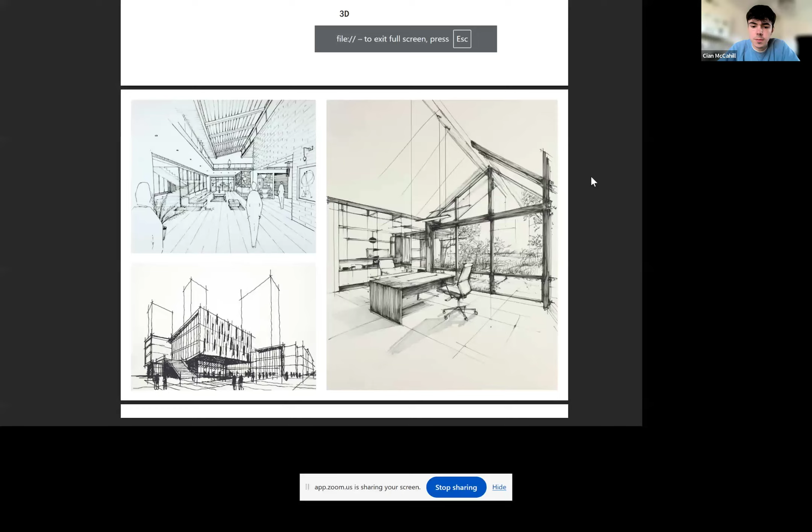So hopefully you guys remember the 3Ds that I showed earlier. You guys have actually just come up with a proposal, an extension or something like that. So your take-home is to produce a 3D drawing of your building. That can be an interior, an exterior, really zoomed in on a certain part of your building, or really zoomed out. It can be 1-point perspective, 2-point perspective, whatever you like, just a 3D drawing that really shows how someone would occupy your space. And yeah, like Jason says, the Padlet board is open.

You're muted. That's 3 times, like third time's the charm. That's not happened in so long.

The take-home task will be on the worksheet, so look out for that. That'll be on our website, and also sent to you as well at the end.

I think there's not many more questions. So last question, I think. Yeah, Alex, I'll answer that in a second about how you submit tasks, so don't worry. Last question for me: what is your favorite part of your job? Favorite part of my job is, oh, it sounds so corny, but it is just doing what I love. Like I said earlier, I've always loved drawing, and I do get to draw in my job. I do get to be creative. It can be such a creative industry, and really exciting. Yeah.